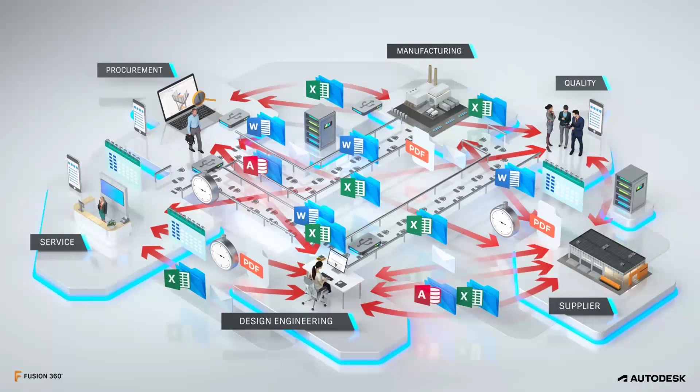Imagine you have a single designer or engineer in an R&D department or a small business. Engineers like this have to wear multiple hats. In the past, that meant multiple products.

Fusion 360, a flexible and innovative platform, can be configured to your team size, use case, and workflow. So you get access to the enterprise grade features and services you need, and only pay for what you use.

In Fusion 360, lots of features are available, like sketching, part design, sheet metal designing, surface designing, drawing detailing, PCB designing, wood designing, 3D CAM, 3D printing—lots of environments and modules available in Fusion 360. But as per our requirement, we can use only the module which is required, and purchase only that module. This is the benefit of Fusion 360.

Generative design identifies thousands of solutions to the problem you define, simulates their performance, and optimizes for your constraints and manufacturing capability. So you can get to more high performing, cost-effective, and sustainable designs that you couldn't have reached on your own, faster.

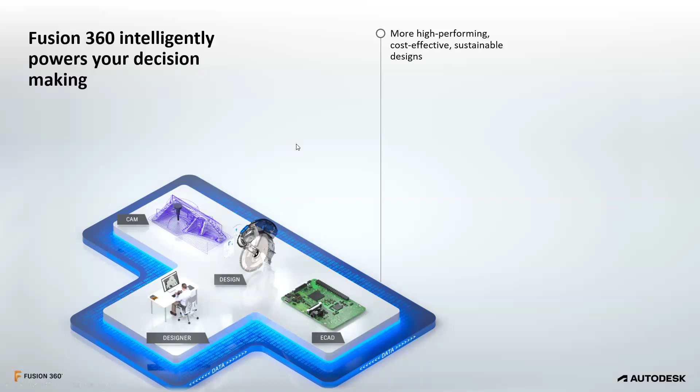The integrated platform connects your entire product development and manufacturing ecosystem with a central cloud-based model, eliminating the friction between people, activities, and machines. So your teams can collaborate seamlessly and spend more time on innovation than iteration.

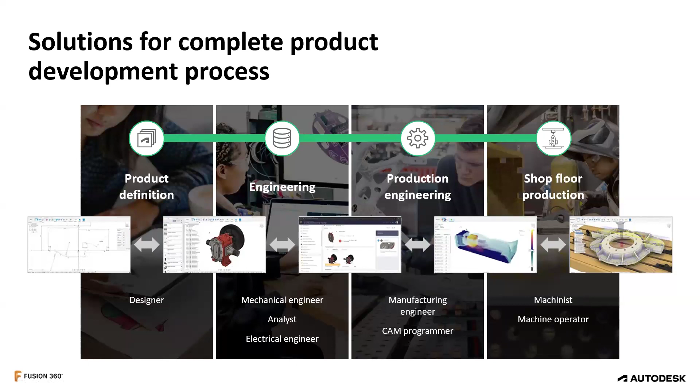AnyCAD features—what is the type of technology important here? Regular design challenges can be experienced when it comes to data interoperability and collaboration. Challenges like working with multiple CAD systems, translation issues, designs not updating automatically, and leveraging legacy 2D data. So how has AnyCAD improved the process in a typical design workflow?

Once the vendor or customer has sent a non-native CAD model, you will then begin to translate the file and save as. You will then be required to use the translated file as a reference and apply constraints. The vendor or customer then sends an updated model, where you once again translate the file and reinsert into the assembly. You then have to manually fix all references and recreate all constraints, creating more work and potential delay.

AnyCAD, on the other hand, provides an associative connection with other 3D CAD applications directly to Inventor without file translation. This includes models from most major CAD systems, including CATIA, SolidWorks, NX, PTC Creo, Pro Engineer, Alias, and AutoCAD, and also generic STEP formats.

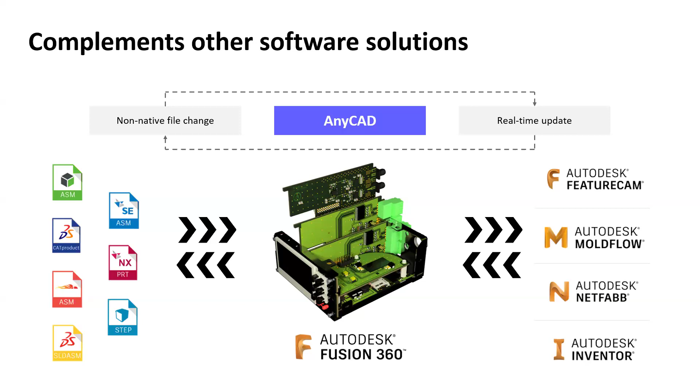Fusion 360 improves workflow between design and engineering groups by offering a variety of modeling methods to meet each team member's needs. With stakeholders working on one unified CAD model, everyone shares information and ideas in real time, increasing efficiency throughout the project.

You can work in both 2D and 3D in one easy to use CAD system supporting essential design methods, with subdivisional, history based, direct, and mesh modeling tools. So design intent is maintained no matter what stage of development.

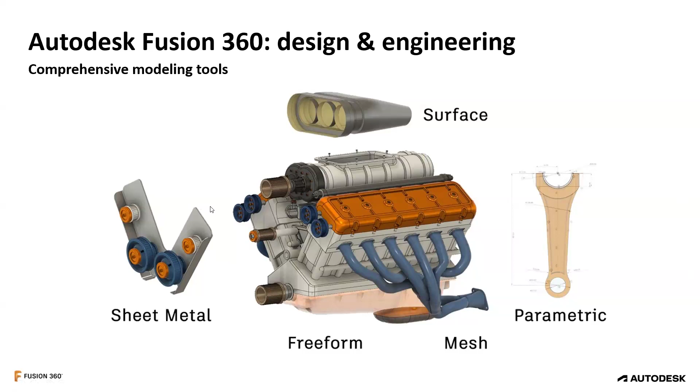Concept development, freeform modeling. What are the benefits of freeform modeling? Reduced design time, easily create complex surfaces, rapid ideation, increased innovation capacity, and the capability of subdivisional modeling, manipulate with push-pull gestures, edit faces, edges, and points, using T-spline technology.

Also, Fusion 360 has a rendering option with very clear, very realistic pictures we can generate through Fusion 360. If we design any type of component or machine, we have to show that model to our client, so we can render that component. Rendering is available in Fusion 360 and we can get very photorealistic images.

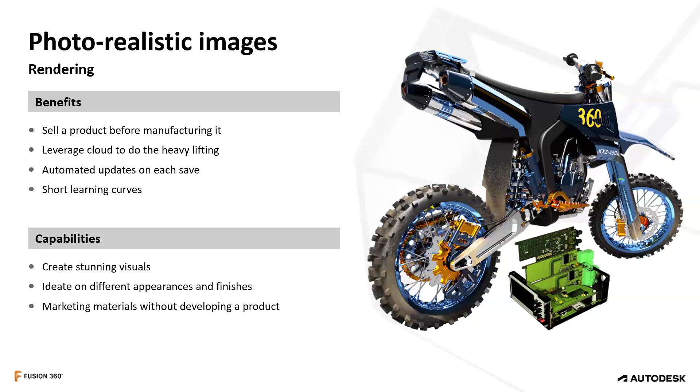Surface modeling, aesthetic surface modeling, parametric surface modeling - what are the benefits? Bridges the gap between concept to functional surface, flexible to change, easily create controlled surfaces, fast learning curve, and adaptable to most designs. What is the capability of aesthetic surfaces?

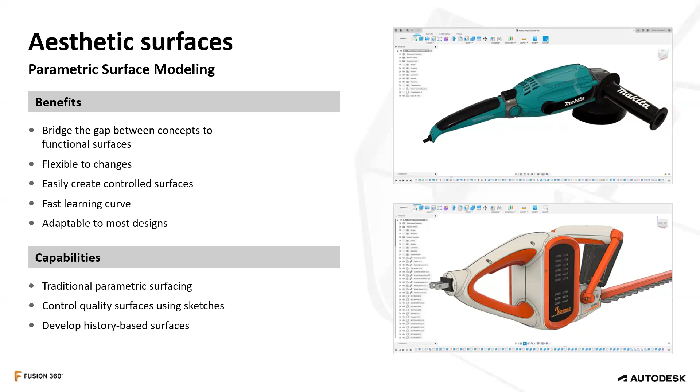Traditional parametric surfacing, control quality surfaces using sketches, develop history-based surfaces, and Fusion 360 is also used for prototype modeling.

What is the benefit? Flexible to change, easily create controlled surfaces, fast learning curves, and adaptable to most designs. The capability includes integrated printing workflow, automating part orientation, printing simulation, and support for plastic and metal printing machines.

Top 5 differentiators from detail analysis: history-free direct modeling, parametric surface and solid modeling, sheet metal, multi-body or distributed assembly design, and all add up to a true hybrid design application.

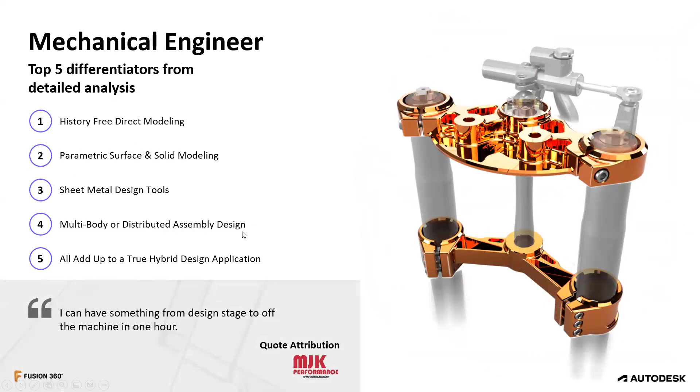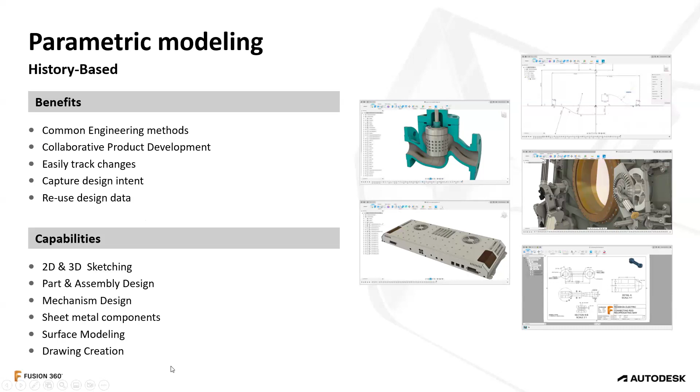We know all the capabilities - sketching, mechanism design, sheet metal, surface drawing creation - all these modules are available in Fusion 360. We already explained freeform modeling as well.

Simulation is another capability of Fusion 360. Different types of simulation are available, like static and non-linear stress analysis, modal frequency analysis, thermal analysis, and buckling analysis. So static analysis and different types of analysis are available in Fusion 360.

If we design any component, we can also check its capability - how much load acts on this component, and after how much load applied it will fracture or break. We can see this in color coding format. Otherwise, we can see all static analysis like stress, strain, and deflection.

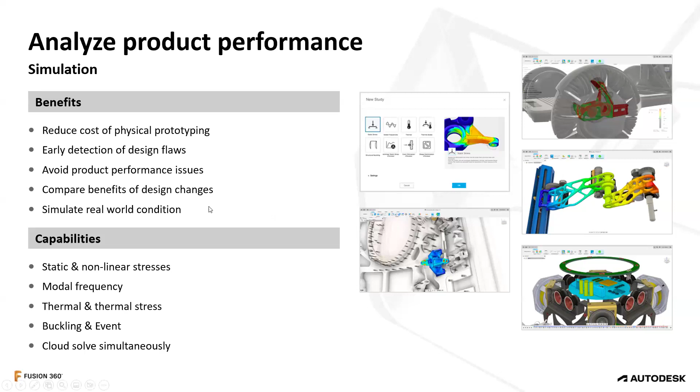Generative design is a capability of Fusion 360. What is generative design? Normally a machine is made of different parts - say 4 to 5 components assembled together. But generative design is different - it manufactures the same functional component as a single body.

If we use generative design, the same assembly is created as a single body. The result is 40% lighter and 40% stronger. We can design that same component as a single body - it's an automatic feature of Fusion 360, and a very good and unique feature of it.

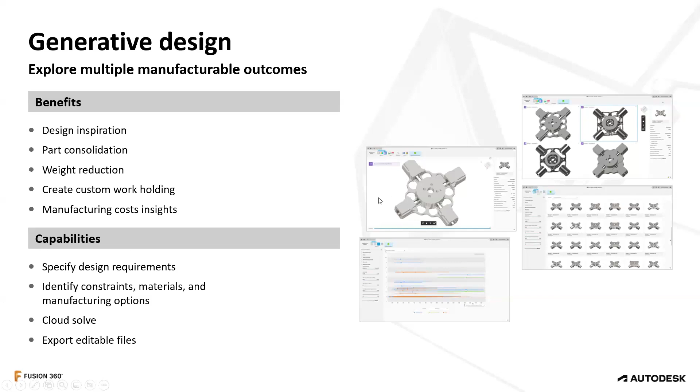Next, electronic engineers use Fusion 360 for PCB designing - ECAD, MCAD. There's also an add-in specifically for PCB designers.

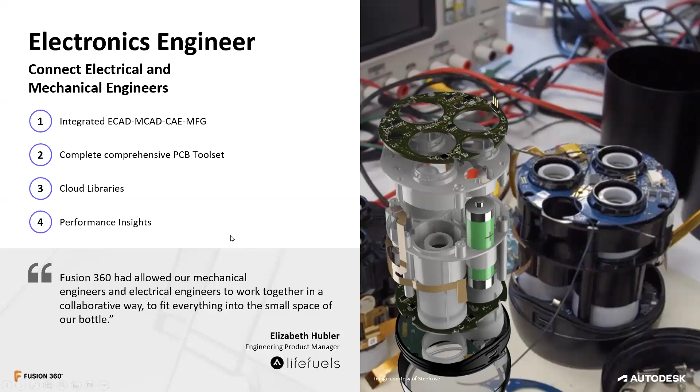So if customers work in the electronic field, they can use Fusion 360 software. The benefits include electronic intelligence that ensures PCB fit, ready to use PCB libraries, and analysis of accuracy and heat conditions.

Let me skip ahead since we have less time - we will also look at sheet metal design, so I'll skip this slide. Just to mention, the electronic industry also uses Fusion 360 software.

So you can see benefits. Also, PCB electronics library here, library editor is also available in Fusion 360.

CAM programming for CAM purpose, like machining, grooving, rolling, milling. Automatic CNC machine use for CAM purposes. So Fusion 360 software is also compatible for CAM machining.

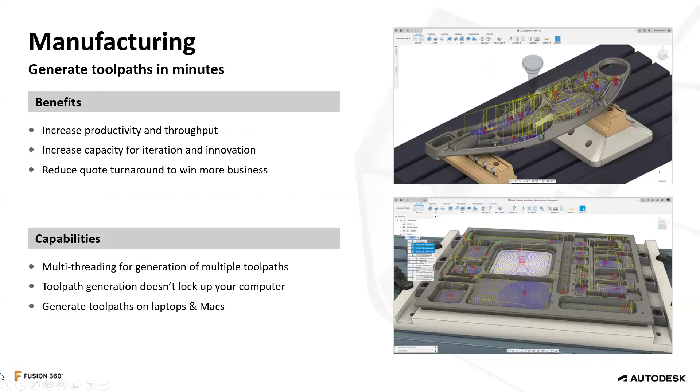You can generate toolpath in a minute. What is the benefit? Increase productivity and throughput, increase capacity for iteration and innovation, reduce quote turnaround to win more business. So that's the benefit of CAM.

There is automatic nesting available in Fusion 360 for sheet metal industries, which mostly use nesting design. The nesting drawing DXF file we have to create through AutoCAD takes lots of time, but we can create the same DXF file through Fusion 360 in very less time, very less time consuming for nesting purposes.

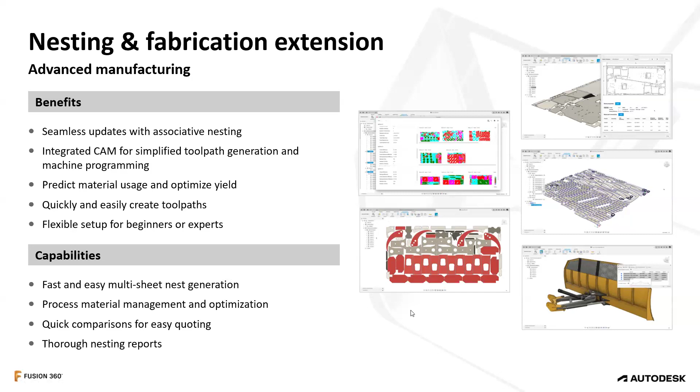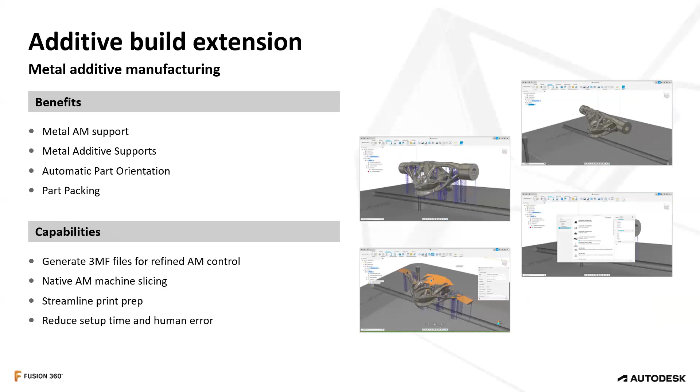So additive build extension is also available in Fusion 360. What is the benefit? Metal additive support, automatic part orientation, part packing. What is the capability of the additive build extension? Generate 3MF files for the native AM machine, slicing, streamline print preparation, reduce setup time and human error. So that's additive manufacturing.

Also, collaboration, highlight, revise, and ship, browser-based collaboration, real-time editing, release management, see who is doing what and where. Capabilities include full product lifecycle workflow, multi-role interoperability, milestone management, multi-platform accessibility.

Also we have one module for data management. We also know tools like Vault and Microsoft Project used only for data management, but Fusion 360 software also has a data management option, management and collaboration. So lots of things are available in Fusion 360.

So let's move on to today's topic, sheet metal design. I'll share my screen of Fusion 360.

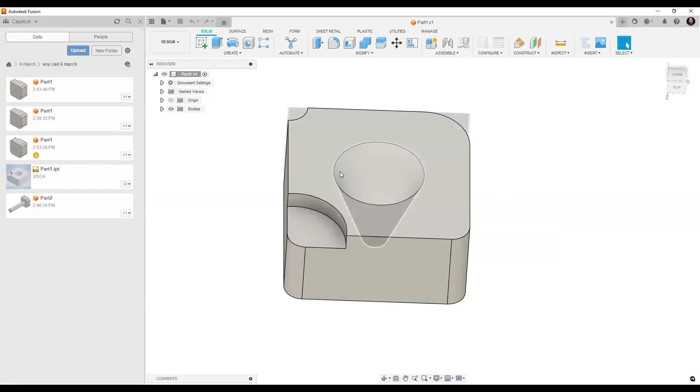Yes, hello. Arvind, my screen is visible? My screen is visible, visible sir. Okay, okay, fine. Yes, yes, visible, visible. Okay, so let's move.

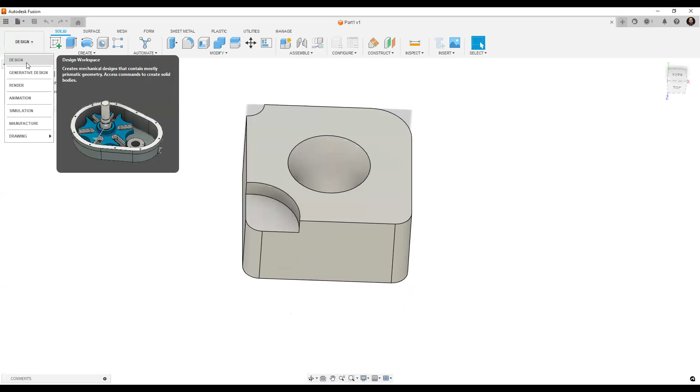This is my Fusion 360 interface, and today I would like to present sheet metal design. First of all, here we can see the modules available in basic Fusion 360: design, generative design, render, animation, simulation, manufacture, and drawing. So today I'm going to show you sheet metal designing.

Click on the sheet metal. Here we have some issue. First, we have to close this software.

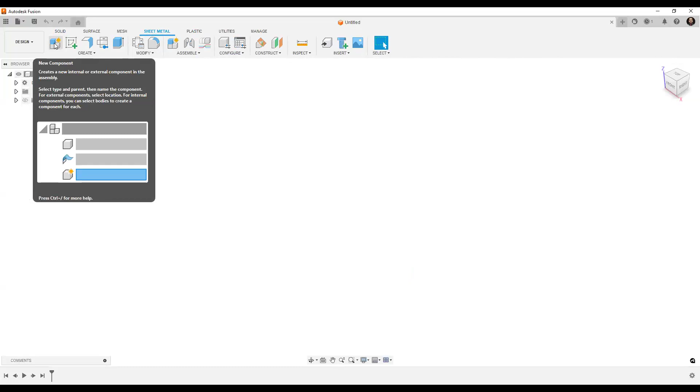After that, first click on sheet metal, and we can see the first option is new component. Once we create any new component for sheet metal, first click on the new component icon, and click OK. So you can see component 1 is added in the model history.

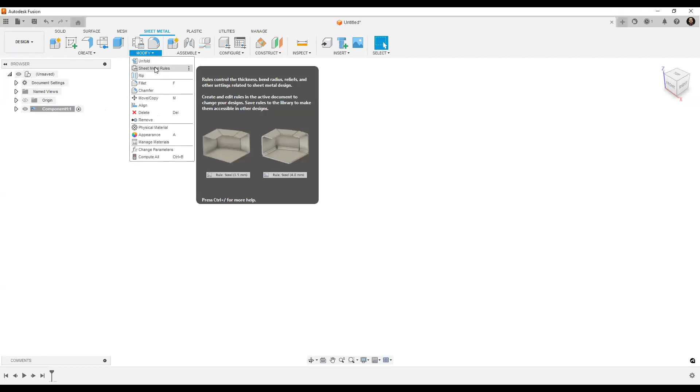First of all, we have to give the set rule. Sheet metal rules option is available in the modify tab. Click on the sheet metal rule, and here we have a library of sheet metal materials like steel, stainless, aluminum. So whatever you like, you can choose the material here.

Suppose I am choosing steel, and if we want to edit the rule, click on edit rule. Thickness is currently given as 2.5. You can type 2, and you can see this K factor for thickness. Just save it. Currently default material is steel, and default rule is steel.

If you want to change the default, say to stainless steel, you can right click and set as default, and it will change from steel to stainless steel. If you want to edit this rule, you can edit it here, just click thickness, give the thickness, click on save button, and close it. So the sheet metal rule is defined.

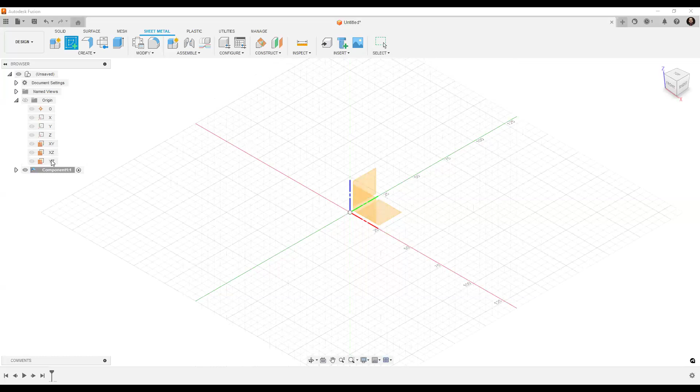Once you define the sheet metal rule, just go for create sketch. Here we have 3 planes available in the Fusion 360 interface: XY, YZ, and ZX plane. Click on the origin option, and we can see XY, XZ, and YZ. Whatever you want, select this plane. Suppose I am selecting the XY plane and creating a sketch.

So I'm creating a rectangle.

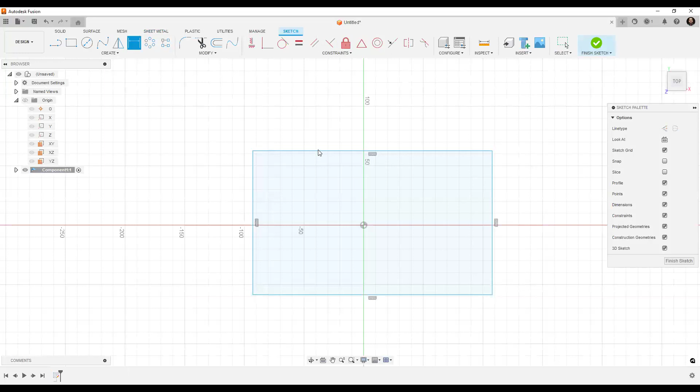Click finish sketch. If you want to edit, you can edit it here with edit sketch, and give the dimension. Suppose I am giving 200, and here I am giving 125. Just click on finish sketch.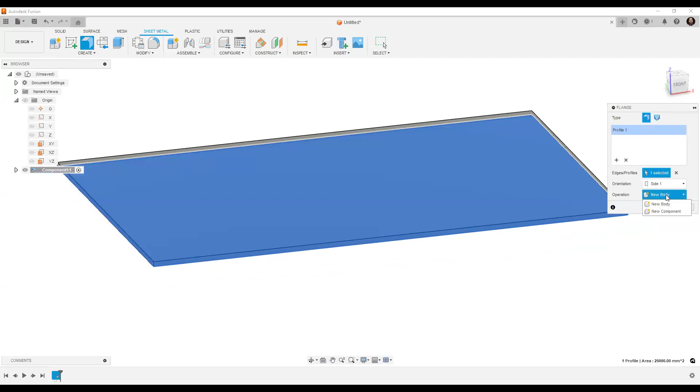For flanges, select sketches, and plate thickness is already set on the sheet metal rule as 2 mm, so it will take the thickness of the sheet automatically. If you want to create a new body, select new body and click okay.

After that, if you want to create a flange, select flange, because through the flange option you can also create a base plate. So one command is used for multiple purposes. I am creating a base plate through flange, and again taking flange command to create a flange.

You can see this is the height of the flange, 90, and we can edit this height here. Suppose we want height 100 mm, we can type it. Also we can edit the angle. Here angle is 90 degrees; if we want angle 75, we can type that.

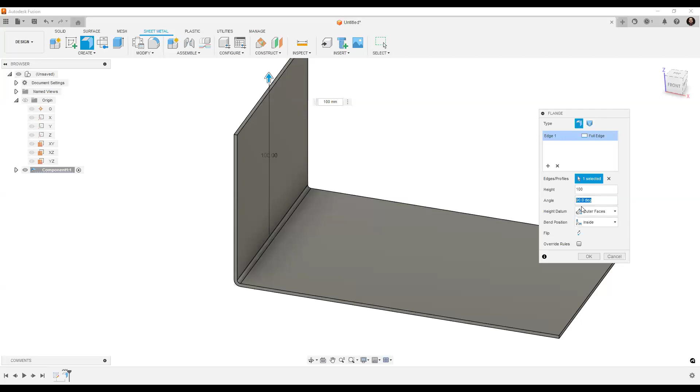If we want to create flanges on these edges, we can click on this plus button and select these edges. Also we can select these edges and press this arrow and drag it. It will create flanges, and angle and height will stay the same.

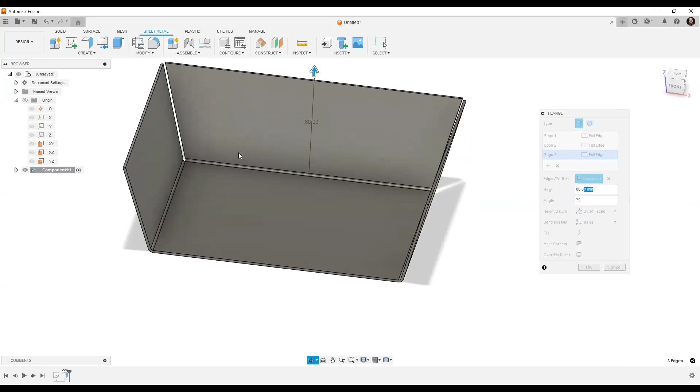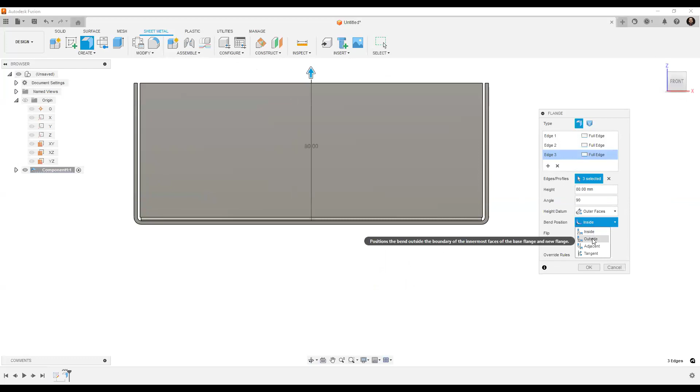The options here are inside, outside, and adjacent. I'm taking angle 90 first and selecting the front view, so you can see what is inside, outside, and adjacent. Inside means the flange is created inside the base plate, and if I choose outside, the flange is created outside the base plate.

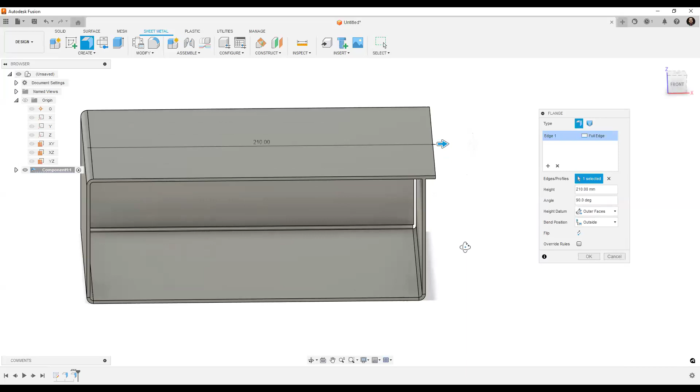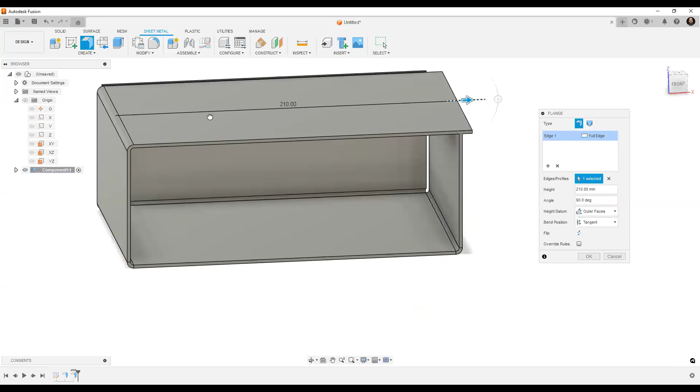Suppose I am creating a flange again. Here the option is adjacent, tangent, and lots of other options are available, so we can choose as required, and just click OK. Here we also have options: full edge, symmetric, two side, two offset.

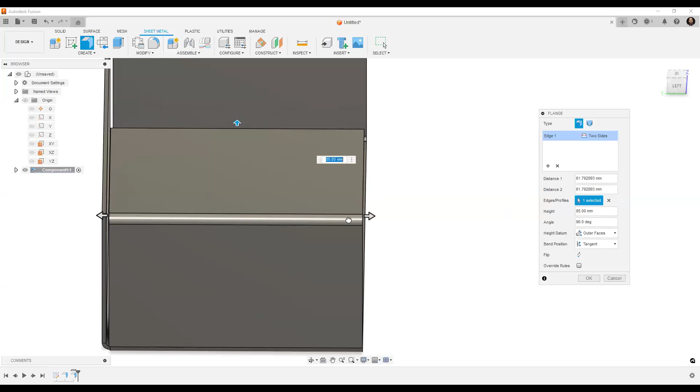Suppose we select the symmetry option; then if you create a flange, it creates symmetrically on both sides. You can change it - distance is 30 mm as required, you can type 25, and it will take that distance symmetrically on both sides. If you take two side, you can type distance 1 and distance 2. Just click - this is distance 2 and this is distance 1. You can drag as well, or type here.

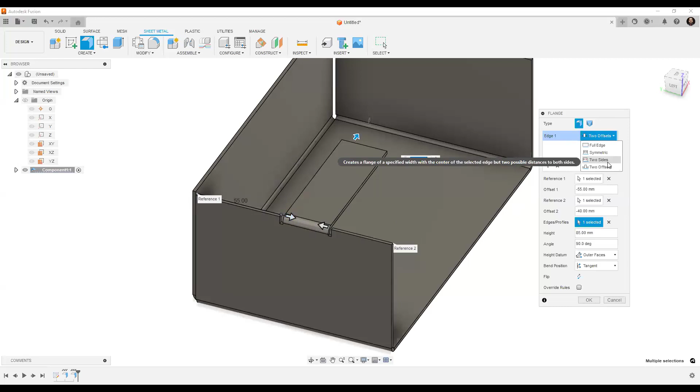This option is also available in the flanges command, along with two offset. There is also two side and two offset options available here. Offset 1 takes the offset through this face, this point - however much distance you offset, it takes that point's offset distance. So there are two options: two offset and two sides, and two side takes the distance differently.

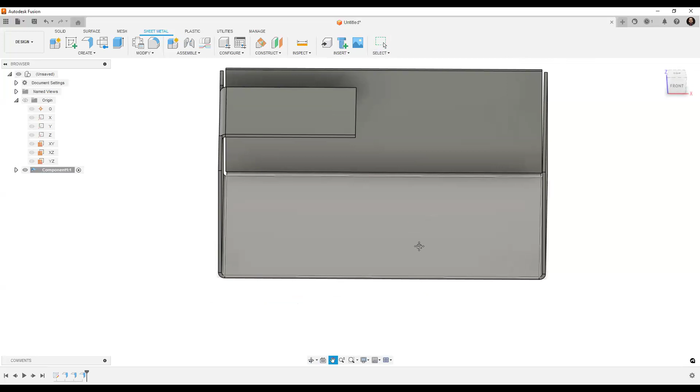Just click on the OK button. Suppose you want to create a bend on the sheet - then we have the bend command option. So before applying the bend command, first we have to create a sketch.

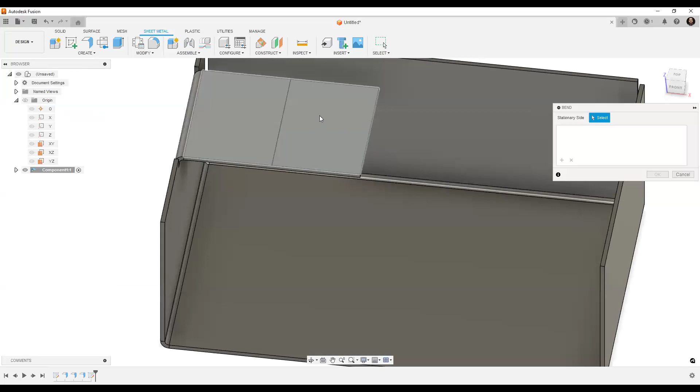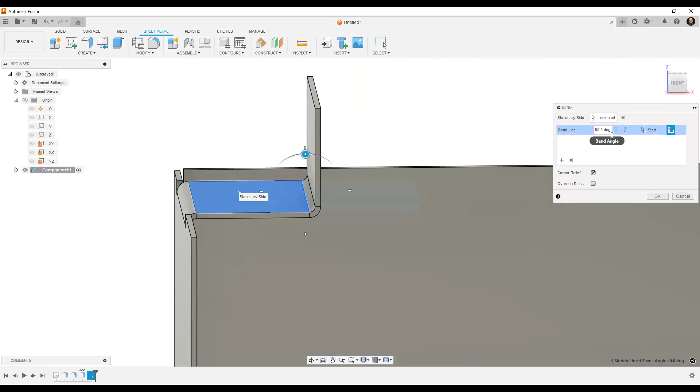Create a line, click on finish sketch, and select bend command. Select the line and select the stationary side - if you want this face as the stationary side, click on this and select this line. It will bend automatically. You can give the angle of the bend, suppose 45, and you can see it will create a bend line.

Suppose you want to create a flat pattern - the option here is create flat pattern. Click on create flat pattern and you have to choose a stationary face. I'm choosing this face as the stationary face - select this and click OK. Then you can see the flat pattern has been created.

If you want to finish, click the finish flat button. Otherwise, if you want to export a DWG or DXF file, click export and choose DXF. You can also save.

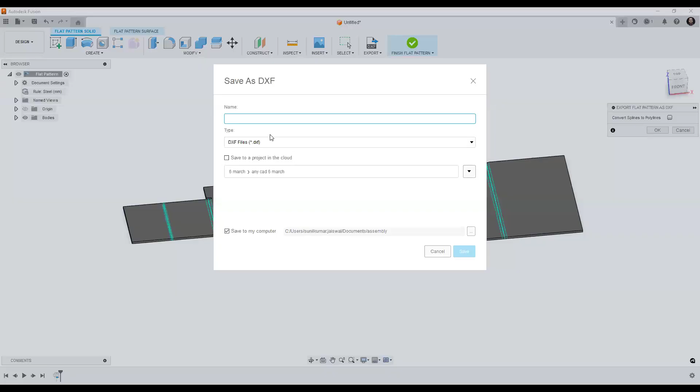You can create and click finish flat pattern. Go to the sketches, and if you want to insert the DXF file, then...

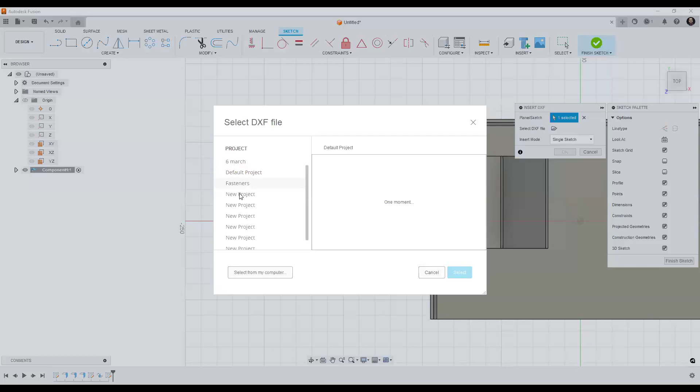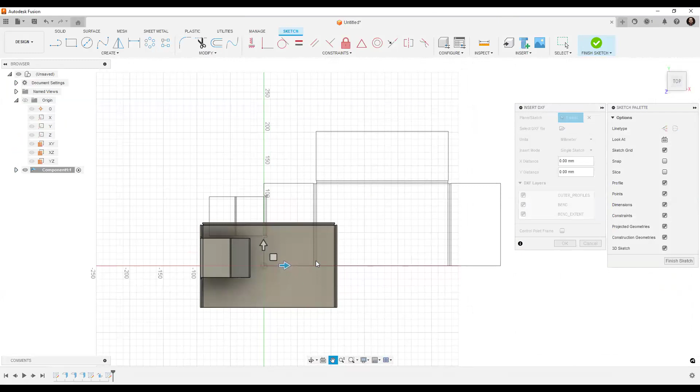Suppose if we don't use bend extent, then we can untick here bend extent, then it will automatically remove. Also, if we want to remove bend line, then also we can select it here and OK.

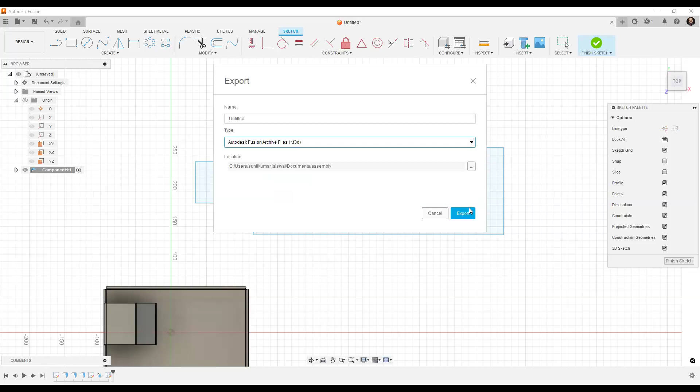Outer profile, and directly if we want to create a DXF file, then just go to the export option, and here we have lots of extensions given like DWG, DXF, IGS, .sat. We can export it, so just finish.

Just I am deleting this sketch. So here a flat pattern option available in model history.

Just right click and activate. So if I click activate button, then flat pattern view is activated.

Also, if we want to finish, then click on the finish flat pattern.

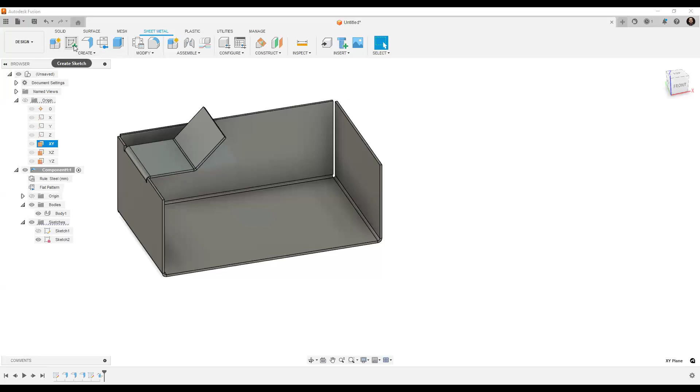So next command is loft command inside sheet metal module. I'm selecting XY plane, create a sketch. I'm creating just one rectangle, finish.

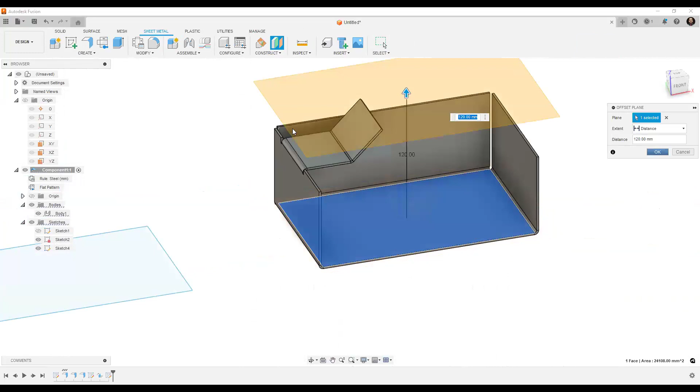And I am creating just other plane, 120 distance, okay. And click on create sketch, select plane and other cross section.

I would like to choose circle. So select circle option and create a circle. Finish sketch.

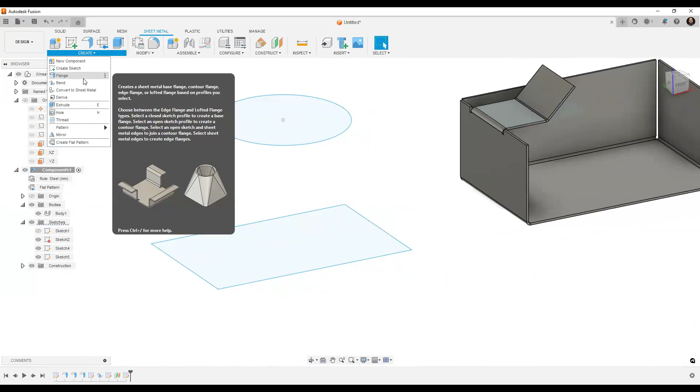So you want to create a loft feature. So also loft feature available in flange option.

Select flange command, and here lofted flanges. Select lofted flange and select first section and other section. So you can see it will automatically create lofted flanges.

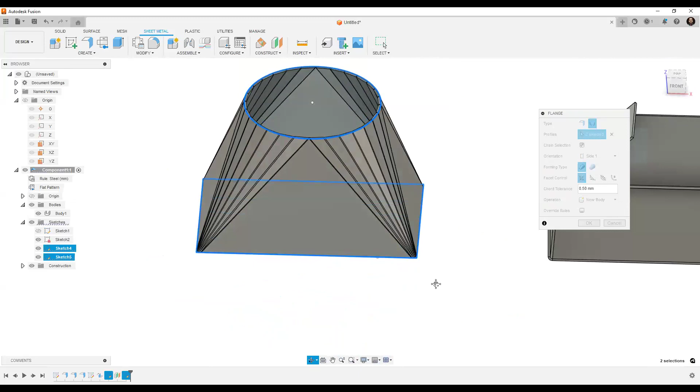And you want to create a flat pattern in this component. So also we have one command which name is rip command, which available in the modify section. Here rip command is available. So select a rip command.

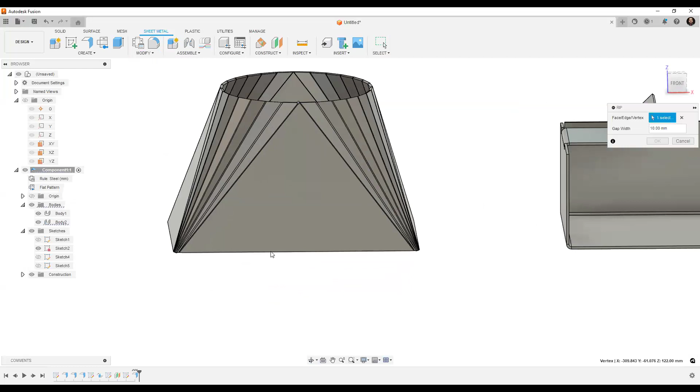First point is this and other point I am taking. There is some issue. Again, I am taking a rip command first. Okay, so gap width is 10 mm.

So it will automatically rip. And if we want to create a flat pattern, then first we have to select stationary face and okay.

Because there is two components and same, so there is some issue. Again I'm selecting this face, okay.

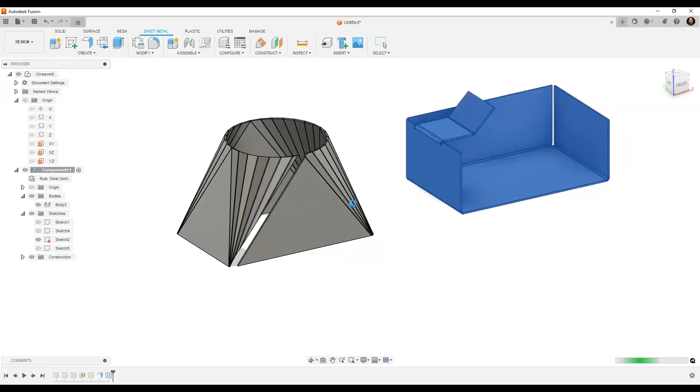So I'm deleting this body first. Okay, and again I am selecting flat pattern.

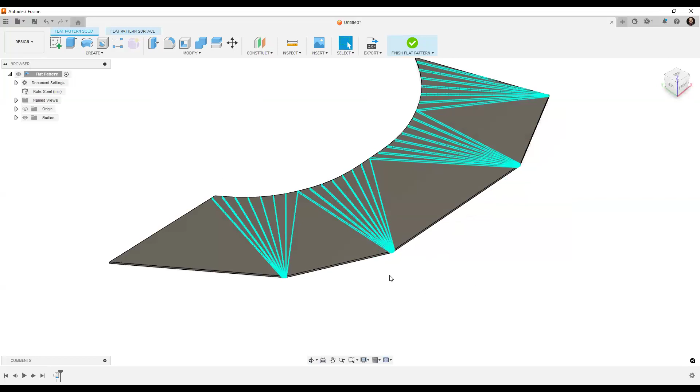So you can see, because multiple bodies available in same file, so that flat pattern has not worked. So you have to use one file for one component so that it will easily work. So you can see, and again finish to flat pattern, then click on the finish flat pattern.

Just I am deleting this option also. So there is also an option, again I am creating flanges.

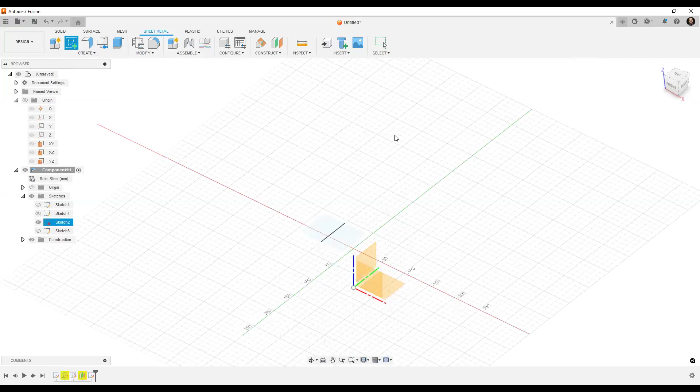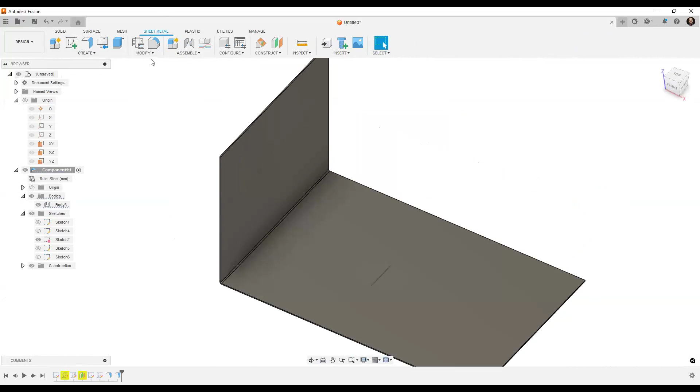So in modify command there is some option like fillet, chamfer. So yeah, here if we create any flanges and just I want to create a fillet and chamfer, then we have option fillet. Just select fillet command and here click on the edges and give the fillet radius.

So we can type suppose 25. So you can see fillet has been created. If we want to create a chamfer, then select chamfer command and select edges.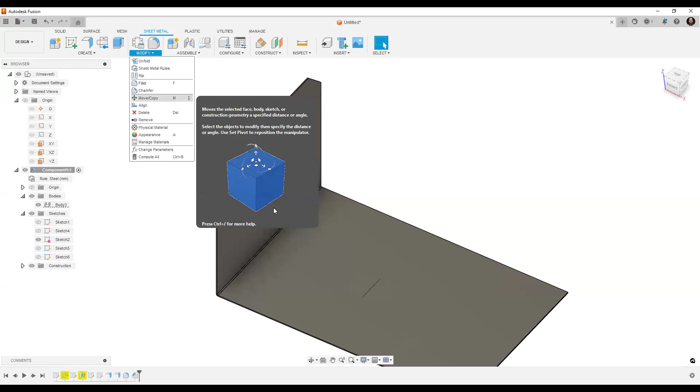Okay. Also, if we want to create a move option, then select move command here, x distance move. Also we have z distance, y distance, we can move it.

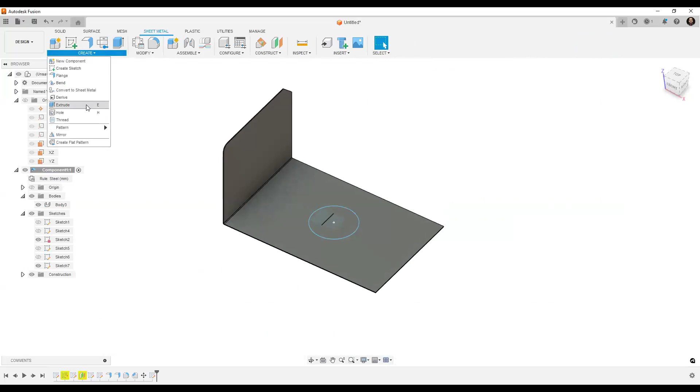If we want to create any cut, then we have option is extrude command, select circle, finish, and here option is extrude, select extrude, and here choose cut option. Okay, so you can see.

And in modify option we have a delete option. If we want to delete this cut, then select and delete. You can see delete.

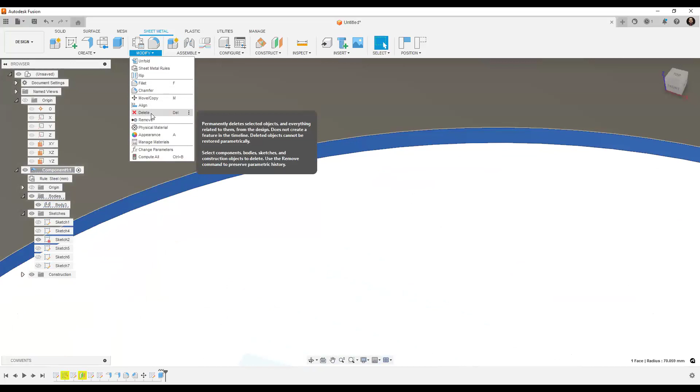Also remove option. Remove option is used for delete whole body. You can delete it.

So this is all about most basic feature of sheet metal module available in Fusion 360, and much more commands are available like pattern, mirror, thread, lots of commands available, but since time is very less, we will move to AnyCAD feature.

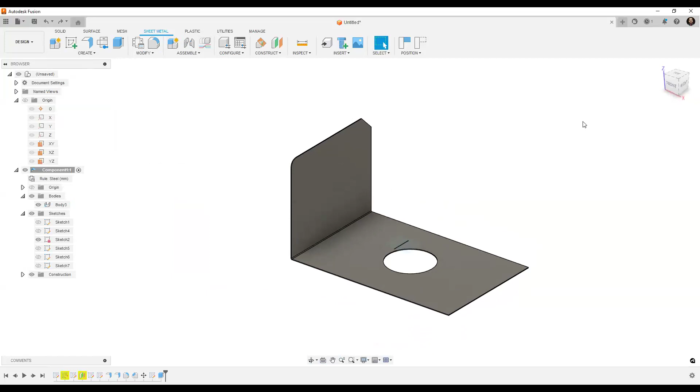So for AnyCAD feature, if we want to perform it, first we have to open two files. Suppose I am opening one file in Inventor screen, Inventor software. So just I'm closing it and go to open here, part 1.

Open. Okay, and this is A360 cloud space. We have to, if same file, I have uploaded here. Suppose go to upload, select file, and just I am opening the same file here. Part 1 open.

So it will upload, progress is processing. It will take a few seconds. After that it will upload here, and we can right click that file and open it. You can see this file has been uploaded, just right click and open.

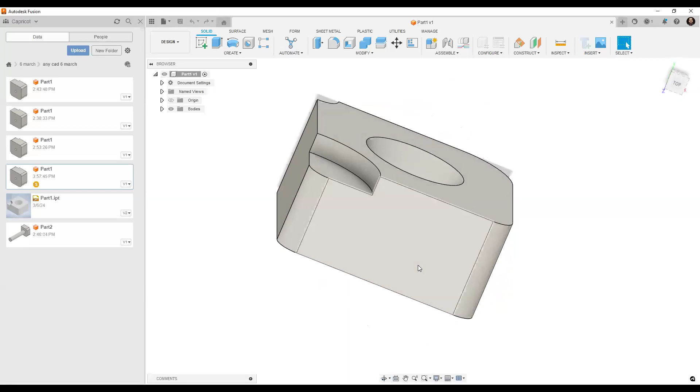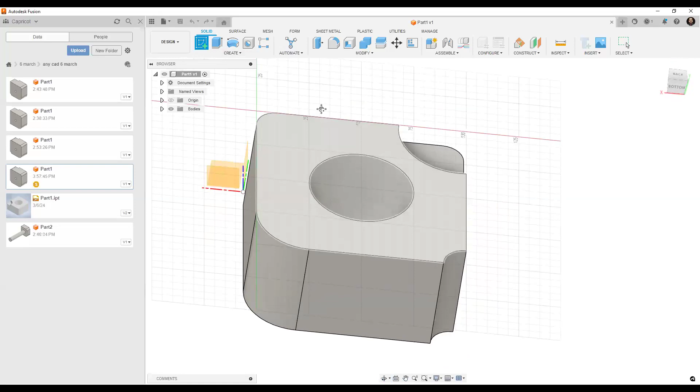So let's see how to edit. Suppose I'm editing something here. I am just creating one hole, and I'm creating a cut, okay.

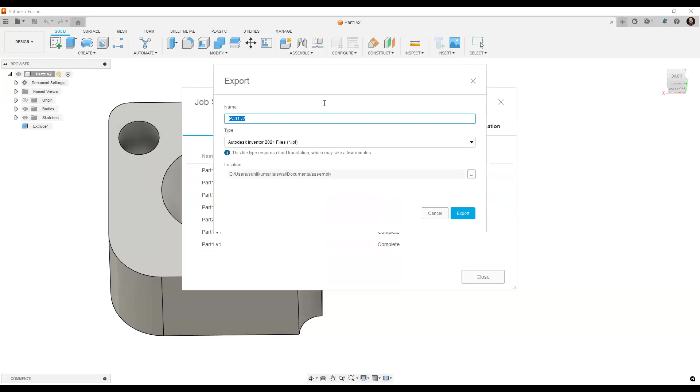I'll go to save, sorry, I don't want to save. I just go to the export option here. We have the IPT option, select IPT and export. It will take a few seconds.

Okay, now suppose here I am editing something. Suppose here I am creating a circle, finish sketch, and just I am creating a cut.

And just save it. After saving this file, we have to go to the A360 web page and upload a new version. Click on upload new version, and we have to open the same file, open.

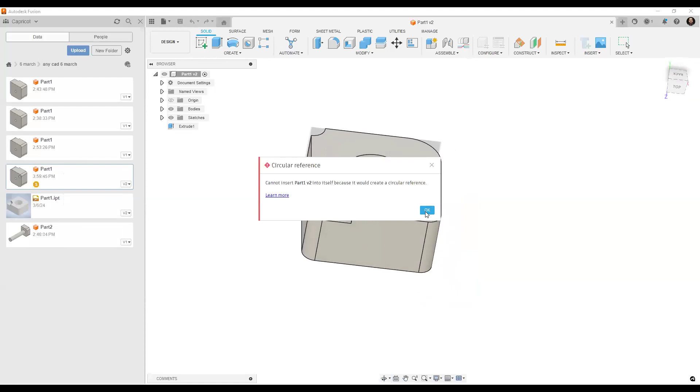So you can see the same file is uploaded here. Upload process will progress, it will take a few seconds. And just open it. You can see the same hole has been created in Fusion 360.

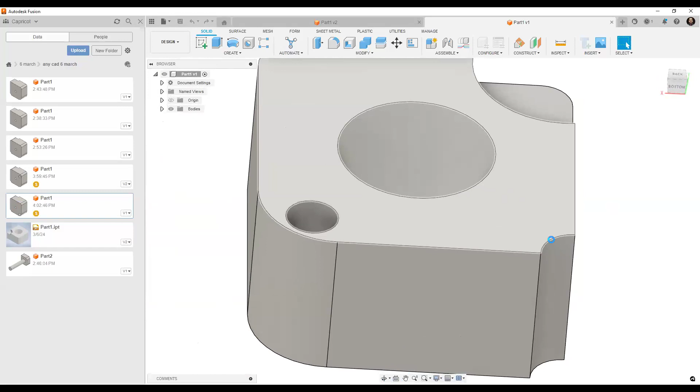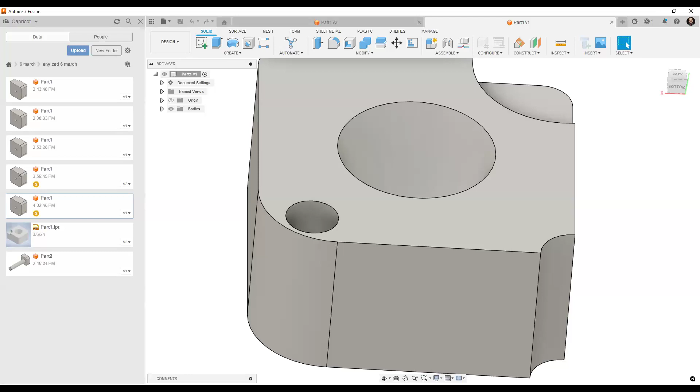So that's all about today's topic covered. First is the Fusion 360 sheet metal module and AnyCAD feature, and we have already explained what features we have in Fusion 360 software. This software is very useful for all small scale industries because we have lots of modules available at very low prices. Some customers use lots of software like SolidWorks, Creo, CATIA, but those cost a huge amount. Fusion 360 is much less, only 25 to 30,000 per year. It takes a small amount and gives lots of modules. So it's beneficial for everyone.